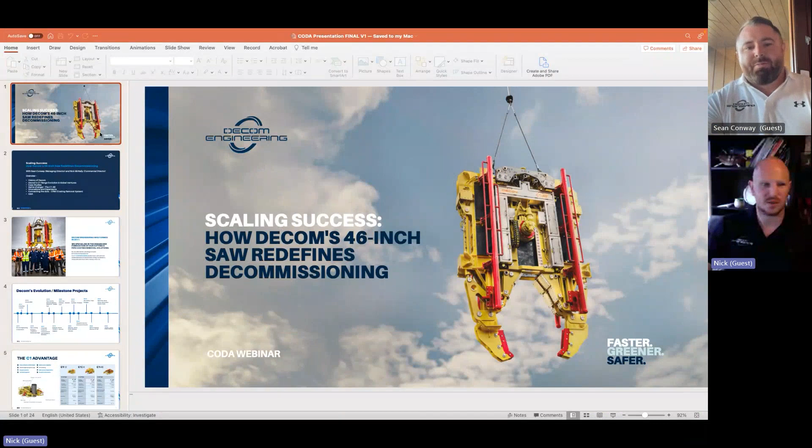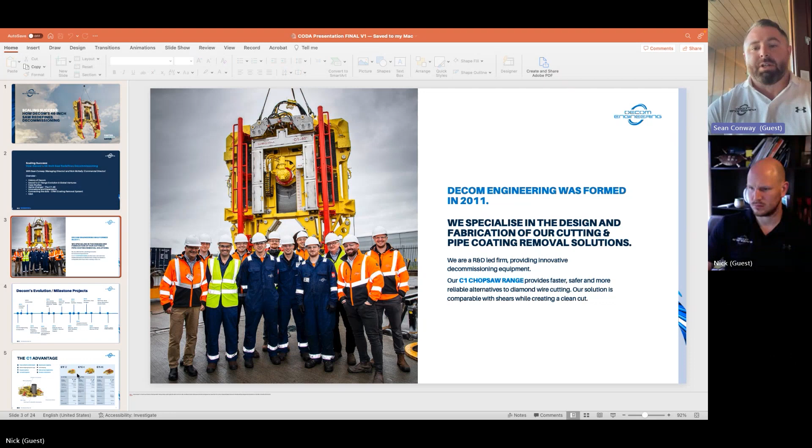Can you see those okay, Sean? Yeah, perfect. Thanks, Nick. So as I mentioned, we initially started in 2011. I actually stumbled upon the product and the idea whilst I was still in university in University College Dublin. That quickly changed and gathered a bit of pace whenever we decided to make a business out of this. Obviously, like all small businesses and early startups, slow going at the start, you're learning a lot, but a key message that you'll see throughout is we're very keen to listen to our clients, our customer base, the market, and that's really helped us shape our products and what we stand for.

So in 2012, we created the chop saw range, predominantly for topside. We didn't want to challenge ourselves too much to try and go subsea right off the bat, but spent the first 3 to 4 years on R&D, going to Offshore Europe, traveling throughout Europe and even into the Gulf of Mexico, getting feedback on where the market's at and where we could fit.

That actually led us to another product, another opportunity. Being a young, hungry company, we took that on in 2014-15, and we established a pipe coating removal system. We deployed that in the UK, Middlesbrough, and ran that for about 2.5 years with a client there, and processed about 6,000 tons of predominantly prime surplus material with 3-layer coating.

But there was some decommissioned material there too. So early on, we started to join the dots and see if we can remove the infrastructure in a sustainable and efficient manner, and put it onto a process, how can we then allow the asset owners to see that full life cycle?

We kept on with the chop saw range, developing a larger product, and obviously a lot of lessons learned. We deployed a machine into Germany on a topside quicksilver pipeline removal job, and we also got the opportunity to manufacture and deploy a pipe coating removal system into a pipe mill in Egypt in 2018.

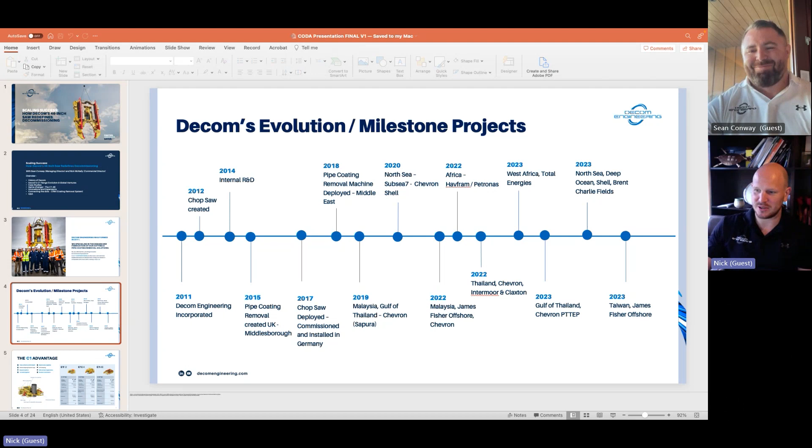But Sean's the technical guy out of the two of us, so I'll hand back to you, Sean, to take you through the technical differences of our saw.

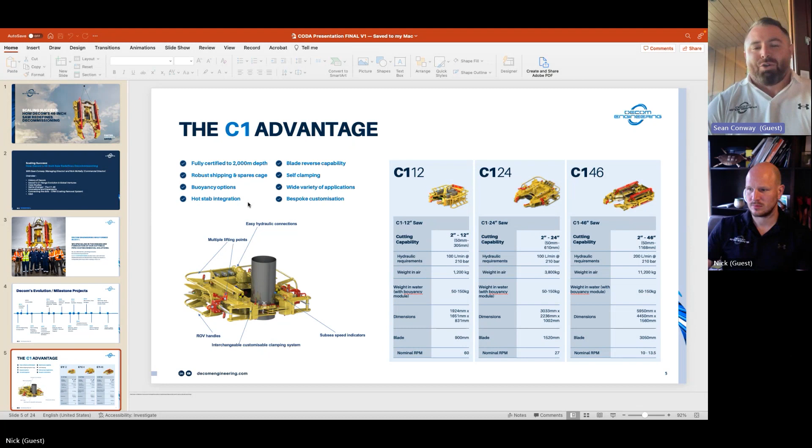Yeah, as Nick says, it has been such a rapid growth from about 2019. We've taken our fleet from 2 saws to 14, and during that production run, we wanted to make sure that the actual integrity and the brand and the qualities of our equipment were brought through all of our units.

So we have 3 12-inch saws, 8 24s, and 1 46-inch. All of them have similar features throughout the brand: 2,000 meters plus water depth, and a clutch mechanism if you hit a difficult spot, a weld, a bit of tension, or a different type of coating. We have an anti-stall mechanism and a clutch mechanism fitted to all of our kit, which allows the blade to cut its way through the hard spot, needing no intervention from the ROV or the operator.

We have a wide variety of applications. The saws are modular in design, so if you have a 50-ton bending moment, as Nick mentioned, or if you want to cut mooring chain and it's all happening on the same deployment, a lot of it's modular. You can add in new clamps. We can support on the design and fabrication pre-deployment to kit you out with exactly what you need for all eventualities. The only thing that really changes is the size and scale, and all the kit will show efficiencies when it comes to cutting standard steel carbon pipelines, mooring chain, flexible risers, umbilicals, and all things in between.

You can do this with the one blade, the one setup, the one machine, and this, depending on what you're cutting and how hard it is - some of the more exotic materials, as you can appreciate, will reduce the blade life - but you'll get between 3 and 60 cuts per blade per deployment.

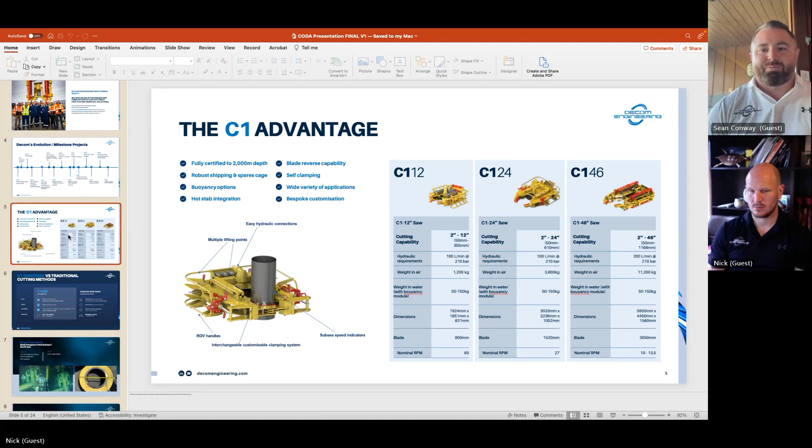Do you want to move on, Nick? Yeah, I'll touch on some of the other elements, particularly the commercial elements.

So price is obviously key, and for our customers it doesn't particularly come through the day rate. If I'm perfectly honest, it comes through looking at the job as a holistic piece. So we have a low consumable cost, and that is significant against diamond wire saws - which, along with shears, are our main competitors. You get, for example, between 30 and 60 cuts per blade on X60 concrete coated pipeline. With duplex, that's maybe reducing to 5 to 10 cuts, depending on the thickness of duplex. That is a saving cost.

The cost of a blade is about the same as a wire, but to be perfectly honest, that's not materially going to move somebody's numbers on these jobs. It's the deployment time - the fact that once you're deployed in the water for your shift, be that 10, 12 hours, you'll cut and move, cut and move, cut and move.

Good example being with the 46-inch at the moment in the water. They're having to dredge around certain spots. Bad weather came in - it was fit for the ROV, not fit for the chop saw. So the ROV was ahead, clearing, doing all the dredging. Then as soon as the weather cleared, they could put the saw in and go chop, chop, chop all the way along. After 5 cuts, they caught up with the dredging. You just can't do that with other technologies - you'd have to come back up, or your cut cycle would be difficult. So that's a massive one.

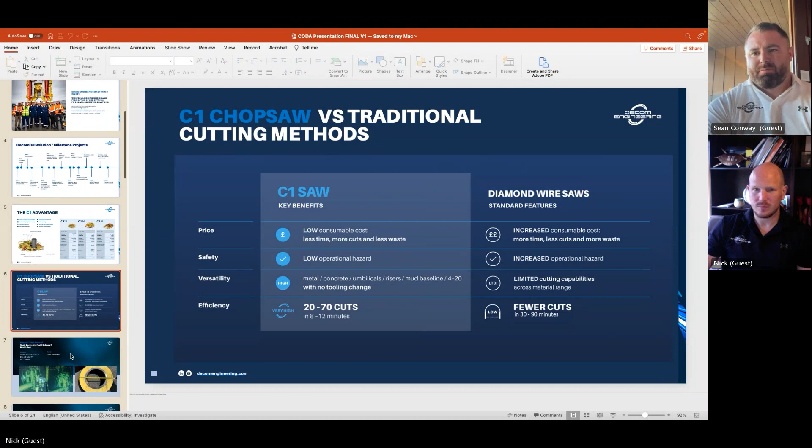What happened is as they were coming through this PU coating, as they were getting near the end, it just couldn't break through. There was just too much compression there.

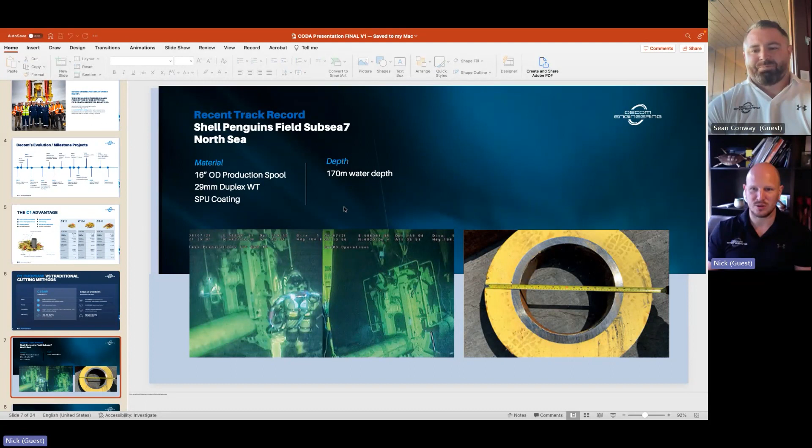So Sean, I'll let you talk about, you're heavily involved in the Havfram Petronas job.

Yeah, cheers. So we were approached in March last year to work on a subsea ROVCOM connector with the inner duplex with a PU coating, and an external X65 25 to 30 mil wall external pipe at an angle with a 50-ton bend moment. That was the main focal point of the 24-inch saw deployment.

It was at about 800 to 850 meters of water depth. There were 16 cuts to be done. Time was critical. We did a lot of pre-deployment tests. We took it to the hyperbaric chamber. We put it in the test tank.

One of the things we like to do with our clients is, with the engineering team we have, we can mock up the structure, mock up the cut, and make sure there's no clearance issues. We actually found there was a clash, so we were able to provide slimmer clamps. Another thing we were able to do was build the cut piece as accurately as possible, so we could cut it for the client, Petronas, and for our contracted client, Havfram, to show them the efficiencies, albeit in a testing environment, but to give them that comfort.

So we got past the testing relatively headache-free. Obviously we had to make a few tweaks, but that's what we like to do. We're engineers by trade, and we like to solve problems.

So that went offshore. We supplied technicians, we cross-hired auxiliary equipment to support the project. We were the main cutting contractor on the vessel. We carried out all 16 ROVCOM cuts, averaging 3 to 4 cuts per blade. What that meant was each asset could be disconnected with one deployment, which inevitably saved days off the vessel time.

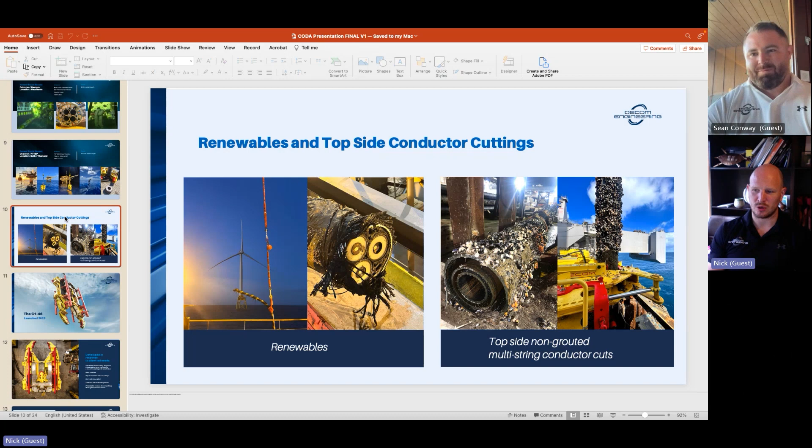That led on to the 46-inch saw. Sean and I had a meeting with Deep Ocean well over a year ago now, and they came to us because the client needed the ability to cut 36-inch pipe with 3-inch concrete wall. That was the challenge. They knew what we'd done in the Gulf of Thailand.

We've gotten to the point now in the Gulf of Thailand where RFQs go out saying 2 times chop saw, not 2 times other technologies. It's proven, it's the acceptable method, and it saves a huge amount of vessel time.

They approached us and said, look, we've got this job coming up next year. Obviously, commercially, there was a partnership there whereby they gave us the commitment to a large scope of work this summer that we needed. There's only so long investors will sit there and let you do unfunded R&D.

Obviously, it sounds simple to scale up, but that wasn't that simple. We needed the full saw.

Obviously, it was new and complex, needed to be fully DNV certified alongside all of our other kit. We needed to have the ability to still rapidly customize our clamps to keep these key features of a 24-inch saw, which wasn't easy as you go up to this size - to keep the structural integrity, the DNV certification of all the lifting points and the structural integrity of the saw with what you're handling, getting through the splash zone - but still allow something as modular as the clamps to be changeable. That's key, and Sean will talk about how that really helped us on the job.

Hot stab integration, even with our top side - even though we go down umbilicals, lots of jobs are either hot stabs or umbilicals. With Deep Ocean, they do both, so we needed to be able to have both, and obviously that was key for us anyway.

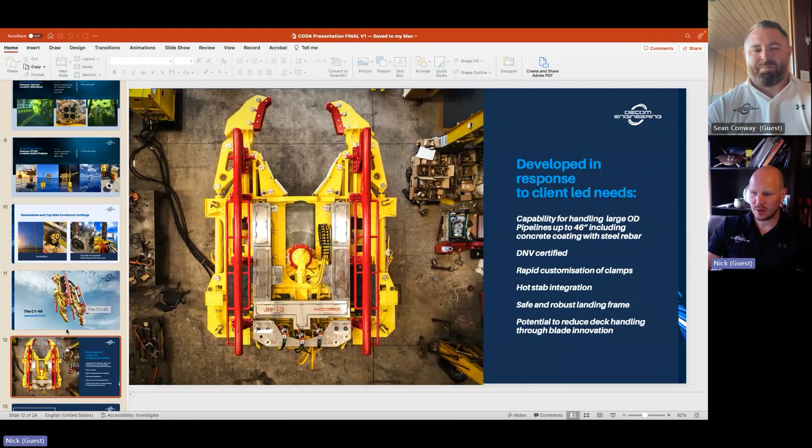Overall, we've developed the ability to cut up to 46-inch. Particularly in the North Sea market, where this first build was for, we looked at it - 46-inch will cover us for the vast majority. So although the job it was developed for was 42-inch, we can go up to 46-inch.

Similar to the 24-inch, it's qualified up to 2,000 meters in terms of its parts, fast and clean cuts, market-leading cut times, very operator-friendly control panel. That's something to touch on across our kit - if people can run similar kit or offshore kit, they can run our kit. Some of the beauty of our kit is in its simplicity: simple to maintain and operate, and really, really crucially, the guys can use similar back deck spreads across different kit.

For example, a 24-inch is only 110 bar and 120 liters flow. So you can really get through and work with a lot of different HPUs and reelers. It comes with a full shipping cage and comprehensive spares. As Sean will mention shortly, we can suit different surroundings and structures by changing the clamps and other areas, and multiple lifting points as well.

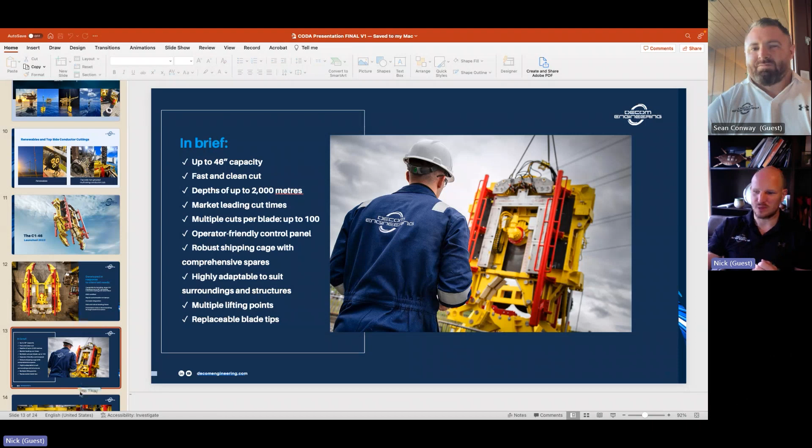We ended up coming through with this, and you can see what we did with the blade tips here - it's probably hard to see, but effectively these are segmented tips. Instead of having one blade, which is effectively one use - once the teeth are broken or damaged, there's normally about 120 to 180 teeth on a blade. Once you hit anywhere between 30 and 70% of the tips being damaged, depending on the level of damage, you have to change that blade out and scrap it or resharpen it and put a new one in.

With the 46-inch, such a big blade - 2.8 meters diameter - handling it is very difficult. So although we do have some traditional blades as well, we introduced a new technology on this job: segmented blades with replaceable blade tips. So if you come out of a job at the end of a shift and there are 10 damaged tips, you just take those 10 damaged tips off and put 10 on.

And it really, really, again, it's all about saving that vessel time, straight onto the night shift and straight back down again as well. So that's been really, really key.

We obviously do FAT tests for clients, though less and less we're needing to do those, particularly where it's new and complex. We like to give both ourselves and the clients every confidence that we're going to go and do the job. It was quite a big one for the 46-inch. We did testing with our 46-inch and our 24-inch to go off on these first jobs with Deep Ocean.

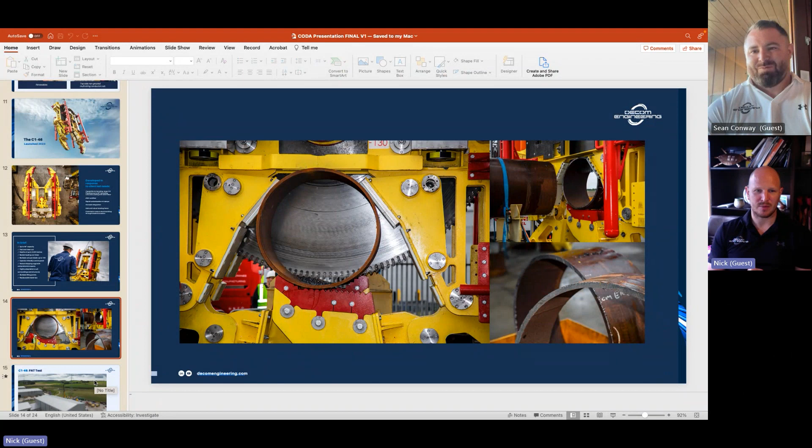So, Sean, I'll let you run point, because Sean was actually offshore on the jobs as well. Yeah, could you play here?

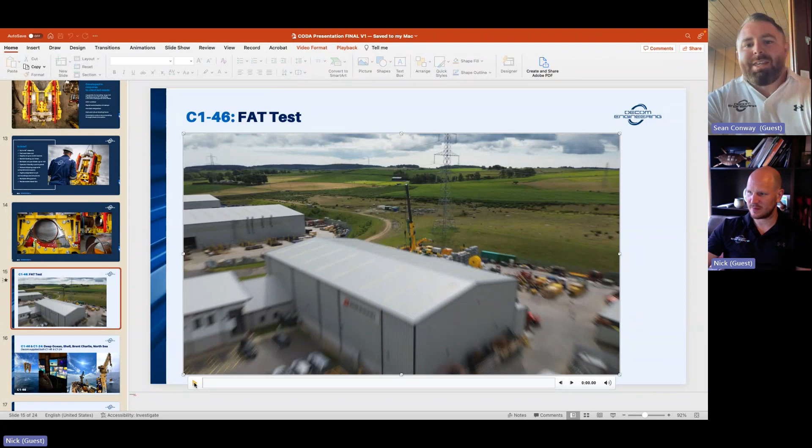Yeah, so we did a video of the FAT test in Aberdeen for the client, and for a couple of key clients. We wanted to make a bit of noise about this large investment we made in the kit, and it was an ideal opportunity just before it goes offshore. So after this short video, I'll talk you through the recent deployment.

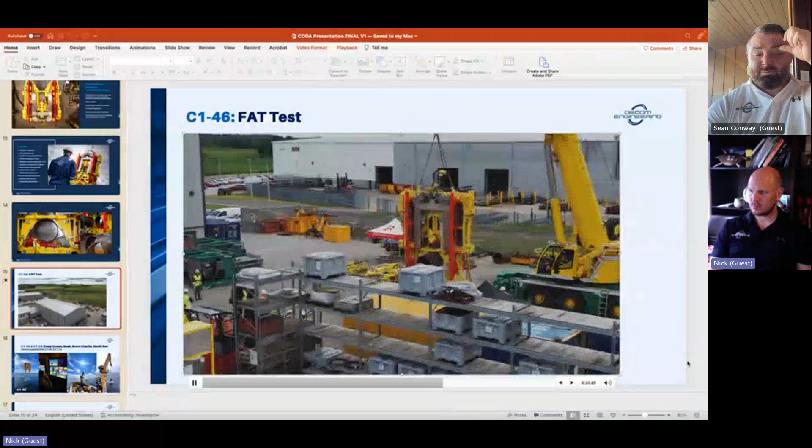Cheers, Nick. I think one of the key things to take away from that video, and we're more than happy to share as much data as anyone requires, is that we fundamentally really take pride in the equipment we manufacture. We take pride in presenting it to clients. We love the challenge that clients present us with in terms of cutting materials and different orientations. One such client was Deep Ocean, and we really appreciate the backing that they put into Decom, but also seeing the other benefits that our current 24 and 12-inch saws had, and they challenged us with the opportunity to scale it up.

Now, I've told our engineers many times that it's just as simple as scaling it up, but I've been told many times that it's not just that simple. So we had to go and do it and prove it, and we did the FAT tests, which went successfully.

I was fortunate enough to be invited onto the Deep Ocean and Shell project on the Brent Charlie. I was there for just under three weeks. Fantastic to see the kit going live. It helps myself and Nick really understand where we can invest more in the business to make life better for our clients, make improvements to our kit, and make life better for our guys.

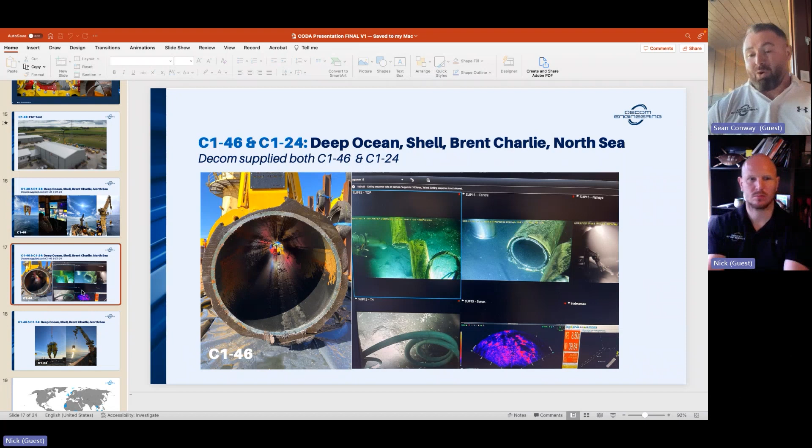We're typically seeing 5 to 6 cuts per shift on a 36-inch concrete coated pipeline. The cut times vary between 20 and 40 minutes per cut. And as you can see here on the left-hand side, the clean cut profile really helps with NORM testing and contamination, and then - which Nick will talk about later - bringing that large pipe infrastructure onshore, putting it onto a pipe coating removal system, removing the coating, and giving a new lease of life for that piece of equipment.

With the 24-inch on that project, we also cut duplex pipelines, mooring chains, flexible risers, as well as umbilicals. So it just shows that between two pieces of equipment, the versatility we were able to offer Deep Ocean - and they're a fantastic company to work with. As I say, they've been very supportive, but we look forward to working with them on various things in the future.

So around about September, November last year, we invested in coming to the region in Perth. We had a few visits with clients, some of which we already knew and had engaged with, some of which were new. Pretty quickly, we were back in Perth in March this year, and we brought over a 24-inch chop saw. We exhibited at the AOG show, and then we carried out a week of demos, which Coda helped and assisted with and came along.

That really helped us see the market opportunities in Australia. And from there, we have secured 3 projects, which will be kicking off in Australia in the next couple of weeks. To be honest, we're just really excited about completing them and bringing more kits and setting up more of a permanent base in the Asia Pac region. It's definitely somewhere we see people put their money where their mouth is.

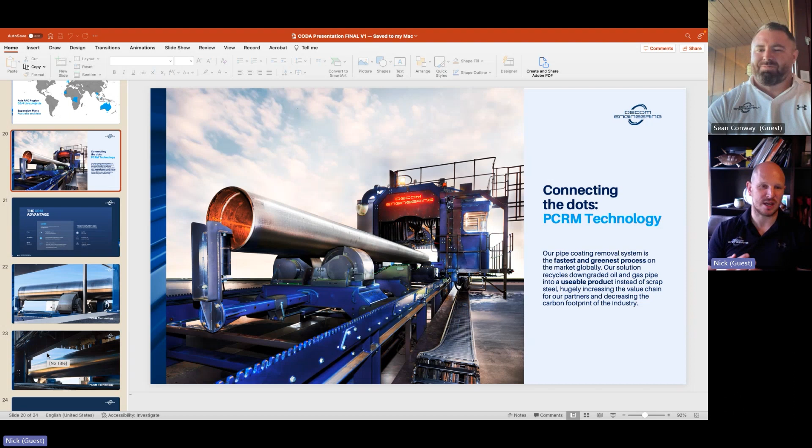So if you can end up reusing that pipe in piling, not only is it going to be cheaper and a shorter lead time for the piling construction industry, but it's also going to reduce the carbon footprint. You can show as an operator that you've brought old product back on shore and managed to reuse it and save carbon.

We capture all the coatings, and actually the plastic that comes off these is really, really high quality plastic.

So yes, you can actually make money from it, but that's immaterial in terms of the actual quantum you'll get. It helps with the financial model, but effectively the fact that you're able to recycle those coatings, and even the FBE in some circumstances can be reused as fuel, means you really are getting almost 100% waste capture.

And we're now able to do that at speed. So for us, it's an education piece to say we can clean cut, we can help handle it back on deck, we can work with partners or run it ourselves. Then once you're on shore, use our machine, clean it, and we'll help you get it into the market.

We won't do that ourselves - there are people who are very, very good steel traders who will support us doing that in every region. So yeah, that's the coating removal machine, and we kind of call it connecting the dots, creating this green life cycle. It's about moving that through into lovely, nice, clean, shiny pipe.

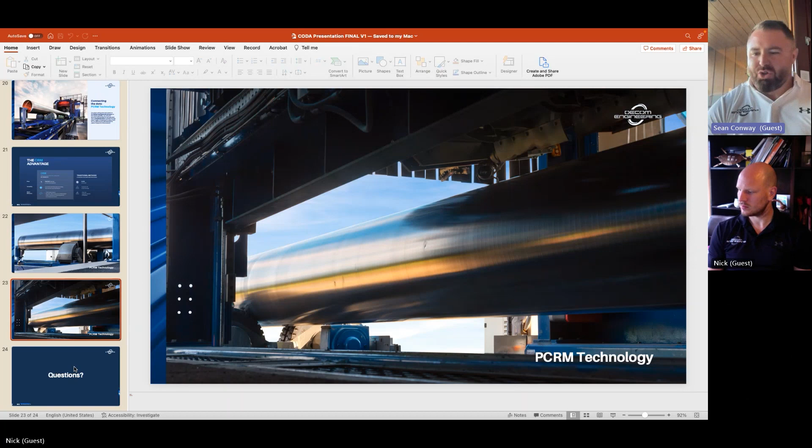A key for us is, as Nick showed in the picture just before, the quality of the steel pipe. We have ensured that the surface of the steel pipe, as well as the weld - whether longitudinal, spiral, or obviously seamless - is not damaged in this process.

If we get a pipeline that is in relatively good integrity, we do appreciate it has lived a life - it's been handled, cut, craned, and transported. But if it's in reasonably good condition, we can take that pipe and remove all the coatings without damaging the actual steel integrity of that pipe.

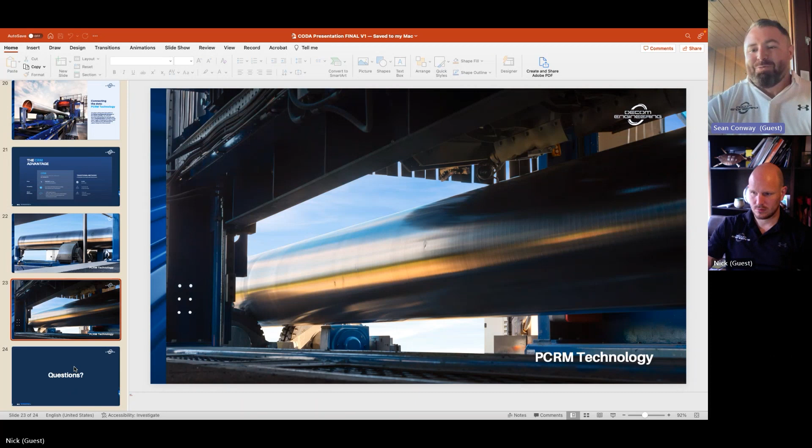But really appreciate you taking the time to listen to us, and welcome any questions that you may have.

Wow, that was very comprehensive, gents. Thank you so much for the journey through the history of the business as well. Got a couple of questions.

I'll start with one coming from Richard: have any of your saws been deployed, or are they able to be deployed to horizontal cutting position by ROV, independent from a crane, presumably with buoyancy? Yeah, on quite a number of occasions we've had the saw completely buoyant on the buoyancy modules and manipulated into position via the ROV. Often in that case it can be powered topside. We have a couple of projects coming up which will be ROV manipulated but powered topside, but often it's through the dirty pack in the ROV as well.

The issue becomes, the 12-inch is really easy - you can do it without really increasing the footprint. The key question is how much room you've got around, because the 24-inch requires quite a lot of buoyancy. If you've got a tight space, it requires a bit more engineering; if not, we can just stick a lot of blocks either side if you've got room. The 46-inch, we haven't done that way yet - there'll be a lot of buoyancy. We're also looking at developing a lighter saw out of aluminium, so that's on our radar, to make it easier to move around, to get into tighter spaces, particularly where you might need to get under conductors for removing it through guide frames and so on, where you've got much tighter spaces.